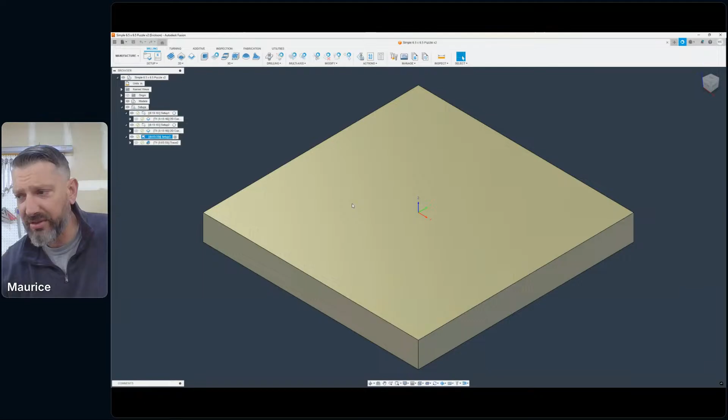So my next video is going to be like an easy to medium to hard CNC project. The easy CNC project is just going to be a very simple 3D puzzle design, and we'll pull these in. So just making the actual puzzle pieces, looking at the tolerances to make each puzzle piece configured correctly. And then I'll probably put a simple design on top, maybe using my laser, maybe my company logo, which would be pretty cool. So that's the easy one, and there's not a whole lot to the file.

I think any kind of basic CNC woodworker can make this and be overall pretty successful on it. What I'm going to end up doing is take that a step further, and I'll pull up the next step.

And this one is just adding a texture, and that would require a ball nose texturing bit, 3D bit, to put these really cool honeycombs in the actual design. Still the base puzzles from the previous design, and then working into something more complex is adding that profile to it, and then all the steps that are required to that.

I don't know, Cosmin. I haven't got rich yet. Matter of fact, I don't sell anything at craft shows, and so I couldn't tell you what that market is. But a lot of things that I make, people reach out, and it does sell pretty well.

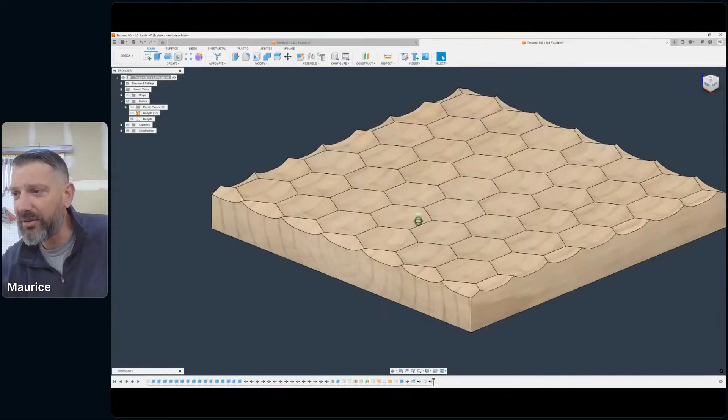And in the manufacturer portion, I ended up doing something pretty cool where I ended up taking a V carve along these lines, and I added some depth to it. So it kind of broke up the 3D surface, and V carving those lines really did a good job of defining those honeycombs. I thought that was a pretty cool feature. Matter of fact,

we'll simulate this, and you can see the depth that this thing is cutting isn't very much, which is pretty cool. So you can paint these if you're using, say, a very light colored cherry or maple. When you paint these lines into this, it does a really good job of defining that space,

and it just breaks everything up. If you ever seen the space warp thing that I did maybe a couple months ago, adding those black lines really defined everything pretty well. So I thought that was a pretty cool feature. Let me make sure this actually has the profile cut into it. Let's bring this back up.

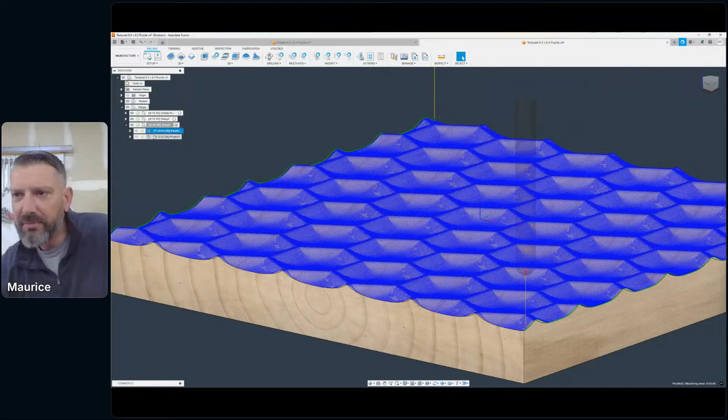So you can see this is a 3D ball nose tool path, and it cuts that in. It does a really good job of it. And I think the overall depth of each one of these honeycombs is probably about half of an inch. So when it goes down, it really does a pretty good job of it. And then just following up with that V carve along those lines, it really does a good job.

But so that's the progress. So something very simple of just cutting these puzzle pieces out, and then additional operations to set this back in the machine and start machining some really cool 3D contours and different surfaces.

You could put it in a laser engraver also, and basically laser engrave anything over on top of it. And it just adds more depth, adds more customization, and these things actually really do sell pretty well. So yeah, that's one of the next steps. The step above that would be, let's pull this up.

So this is a more defined honeycomb, and it has a very defined 3D surface where it's really wavy. I ended up following the wave of the honeycomb pattern that I have with the dimples and how the dimples go on the surface. So again, all of these are additionally within the CNC to make that a reality.

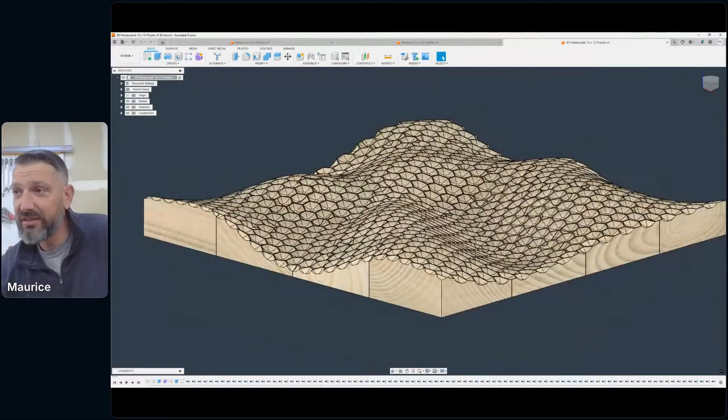So really defined, very, very wavy. It's going to take a while for this to machine, but you can see the honeycombs follow that 3D surface. And I thought that was actually a really cool feature of doing that. And again, these are all 3D. These are all puzzle pieces.

So I'll pull one out, and you can see the definition of this puzzle piece when somebody puts this thing together. It is very unique. And those black lines you see there, right? That's the V carve defining that portion of that honeycomb.

If I didn't have this in here, it would be hard to distinguish how that actually lays in. So again, those little details really define it. But yeah, so that's the 3D portion of that puzzle piece.

And it's just a build on. So if you can get through the simple portion of just cutting out the puzzle pieces and then getting into the more advanced steps with different types of bits and operations, tool paths for the CNC, it's almost endless on the possibilities of defining that piece to the overall structure that you want.

I did a couple more 3D designs. I did one, ended up doing a star version of this, and yeah, we'll see if this pulls up. So you can see the puzzle pieces, this is a round puzzle piece, and what ends up happening is this builds a kind of tray, and these trays are, I want to say, about 7 inches in diameter, so it's actually pretty robust, and I hope this star pattern will come out pretty well.

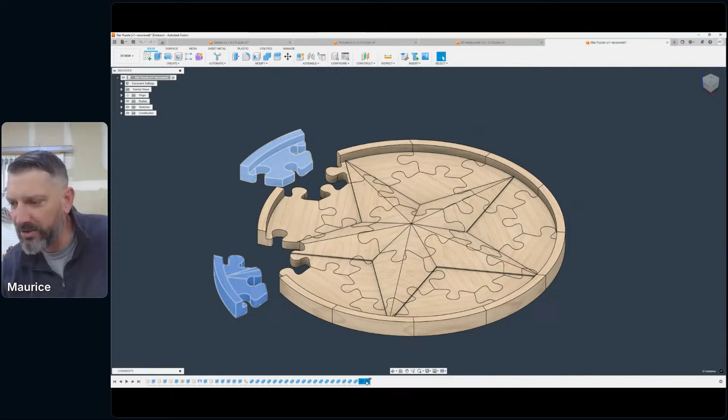So I'll put the puzzle pieces back in, and let's change this up so you can see the definition of that star. Again, these are all puzzle pieces that are putting this thing together. So if I wanted to move a middle piece, you can see how all of that interlinks together. And what's nice when you're using Fusion 360 to build some of this stuff, is you can see...

The toolpath generations give you a really good idea of what the final outcome is going to be. So you can visualize different woods, different types of coloration that you want to put into it, and you can build a really good picture of the final end state before you even step in the garage to realize what it's going to actually be. So it's pretty cool.

So over the last 2 months, that's kind of what I've been working on. I haven't been posting a lot of pictures. I haven't been in the garage for a really long time. And this week, I'm going to go ahead and do a video on the step by steps and then the progress from easy, medium, and hard projects for the CNC.

So that's where I'm at. It's kind of a pretty good overview of what's going on.

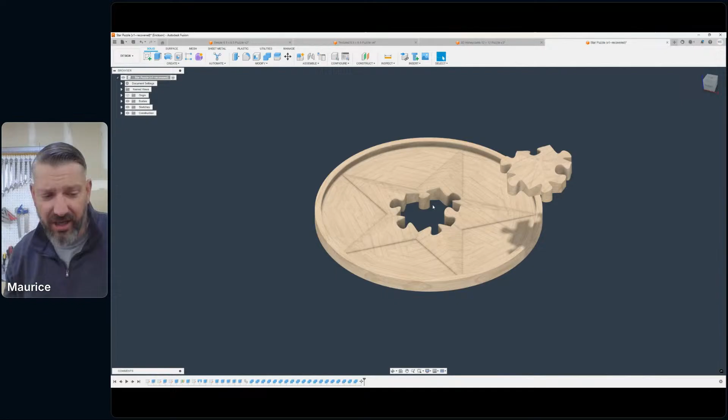I'm probably going to get into actually drawing a more 3D pattern today, kind of a dish puzzle, kind of like the warped space theme that I did, and start working through the design process and make that a reality. So if you guys want to stay for it, if you guys want to ask questions, great, that's the whole purpose of the live stream.

And I'm probably going to jump into Fusion and actually start making this. Pretty good, it's something that I've been waiting to do for a while now. So let's put this back in. But yeah, endless possibilities with different designs.

So let's go back. So I'll kind of work through the workflow that I did for all these iterations, and what I ended up doing, I started with this.

So I'm going to go ahead and just save as, and then I'm going to do this as a 3D warp puzzle. Let's do space warp. I think I'm going to keep the space theme.

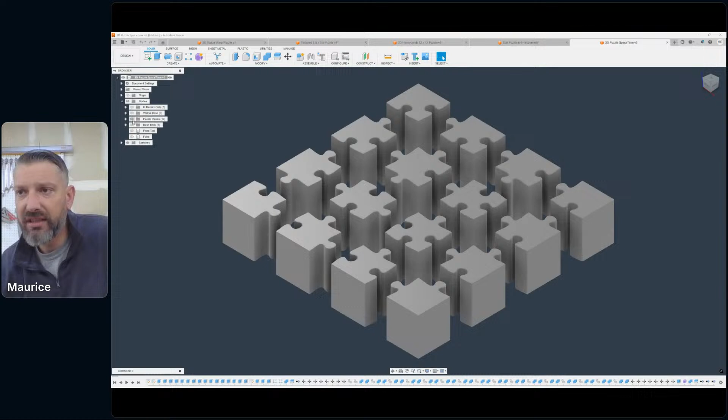Yeah, yep. So I'm going to make this today. I'm going to CAD this out exactly how this is. And you can see that it has some pretty cool features.

I'm going to cut this into this base of this walnut, and these pillars are going to hold this thing up. But as you put the puzzle together, this is a puzzle piece, the base is a puzzle piece, and then these are all individual puzzle pieces.

And let me pull this one out. Yeah, they're not grouped, it's okay. Let's do this. Yeah, so very basic.

I'm going to cut a little dip into the wood. That way, when you assemble the puzzle pieces, the first 4 pieces that you assemble will go right into the box, right into the base. The pegs will get inserted, and then you'll eventually just go ahead and start making this. So actually, yeah, let me hide all these.

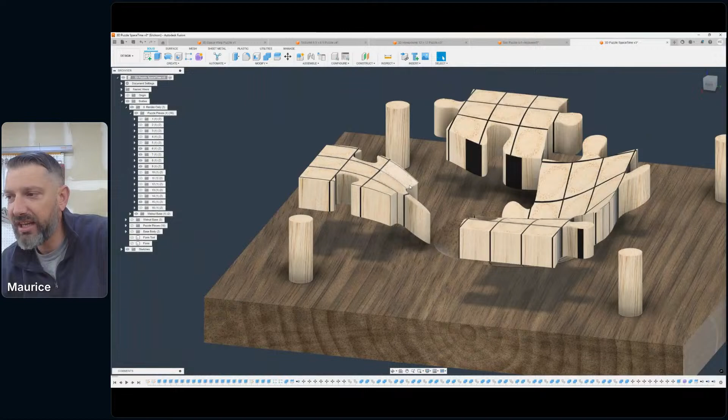So you can see how each puzzle piece fits, and they're all suspended. That's a pretty good radius for this piece right here. And they're very, very unique. The tolerances, when they connect to themselves, will eventually hold everything together, which will be pretty neat if I can actually get it to work.

But I'm going to redesign this because what I ended up doing is making these individual bodies of these lines. I don't want to do that. Originally, I was going to make an end grain cutting board, and then when you cut them, you can insert veneer strips to get those really fine lines, and they'll go all the way through the material.

With this project, I'm only going to V-carve these black lines. So it's just going to be one solid block of wood that I cut each puzzle piece out of, and then those puzzle pieces will get V-carved for those lines. It's a lot easier, a lot faster. You could still glue everything up and put the veneer lines in, but that's pretty time consuming, and that's something I didn't want to do. I already did it once, and it was pretty labor intensive.

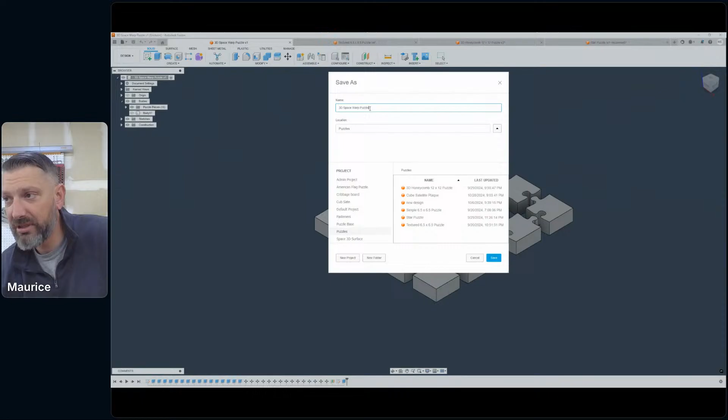Okay, so I'm going to hide all this and exit out of this. I'm not going to save anything, but what I'm going to do is use this file. I'm going to save as, and put this in my puzzle folder, and this is going to be the 3D space warp puzzle. So let's save as there.

And then I'm going to delete. I'm going to keep that. I'm going to go back to my original sketch. And these are the puzzle pieces that are put together. To get this, when I extruded it, I just moved those pieces away.

So that way I could have enough room for my bit to go through. I don't need that right now. I'm going to save that because I'll use that as cut files for later. But let's go ahead and extrude all these to 1.75. And more than likely, I'm going to use this block of cherry to cut all the pieces out.

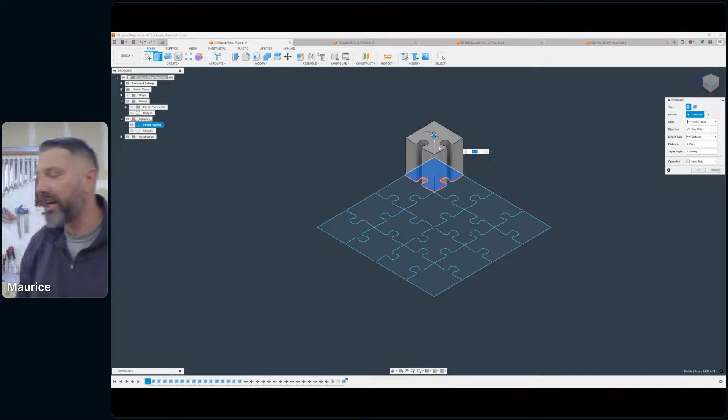Right now, this is planed to 1.75 inches. Let me get my calipers. Yeah, it's right at an inch and 3/4. So this is my base material that I know I have. I'm probably going to flatten it just to make sure everything is extremely flat. But yeah, so the end state is to get these to 1.75 inches.

So I'm going to extrude all of these and get the overall depth of it. Actually, let's do this. So these are 1.75. And I'm going to do a new body, that way it doesn't pull everything together.

And then I'm going to right click and hit repeat extrude, and I'm going to do that for all of these. I'm going to copy this so that way I can paste. It's saying it's not wanting to go for me.

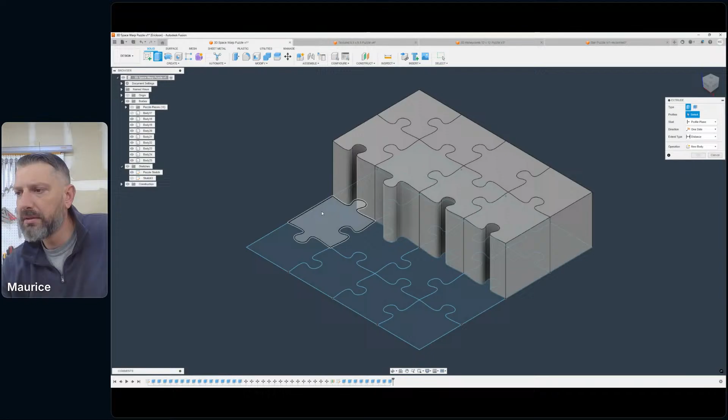I just got to make sure every one of these are brand new bodies instead of joining them with the other two. And then I'll come over, right click, repeat extrude, new body, repeat, new body. And last one.

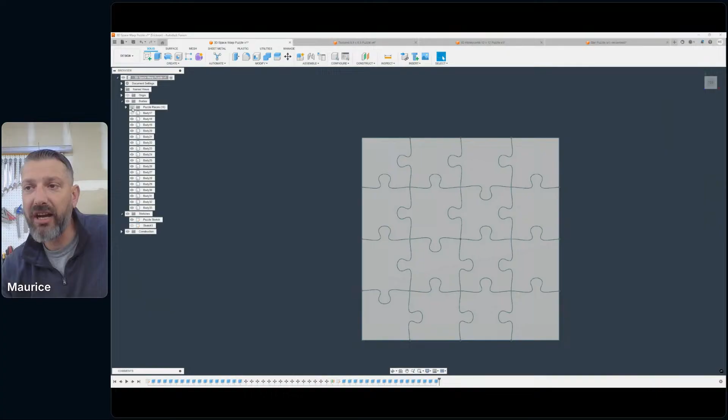Okay, so the completed puzzle with all the pieces, I forgot to mention, the square that I did was 6.5 inches by 6.5 inches by 1.75 inches depth. So now what I can do is manipulate these to where if I need to cut them out, I can move them however much distance I need to allow enough room for my bit to come through. That's why I saved this other file, these other bodies.

But what I want to do is use this as a base to cut a 3D profile into. And so with that, I'm going to go ahead and make that 3D profile. What I want to do is make it like that warped space, the space time holder that I did. And so to do that, let's go ahead and hide these bodies.

I'm going to hide this sketch, and I'm going to draw on the bottom plane a new square. I'm going to use the 6.5 by 6.5 square so I keep everything symmetrical. I'm going to extrude that by 1.75 inches, or 3/4.

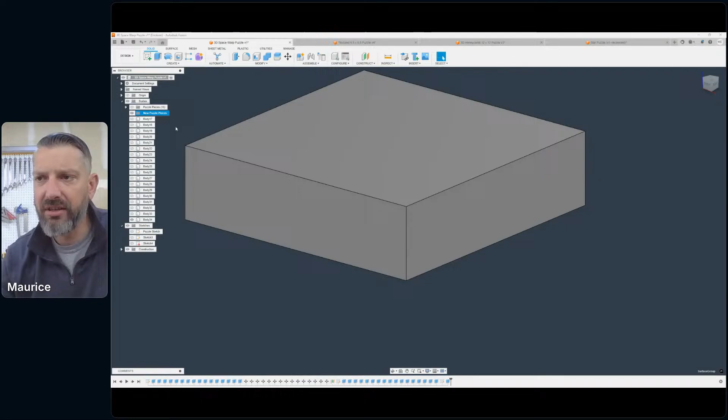Let me hide these. Now, since I've made all these bodies, I'm going to make a new folder, a new group, and call these new puzzle pieces. I'm going to dump all these in there, and that really does clean everything up, so I can see all my puzzle pieces after I unhide everything.

I'm going to hide that and bring this body back in. I'm going to create a form off this. So I already have known goods, and I can build a plane off of this box of these dimensions.

I'm going to go up here and click 2-point, select this point, this plane, and then this point to this point. When I'm building a form, I like to keep the number of intersections very small. So I'll hit OK on that, and then bring this down.

That will give me that space-time scene that I want. But I don't want to bust through this because that's the material that I'm working with.

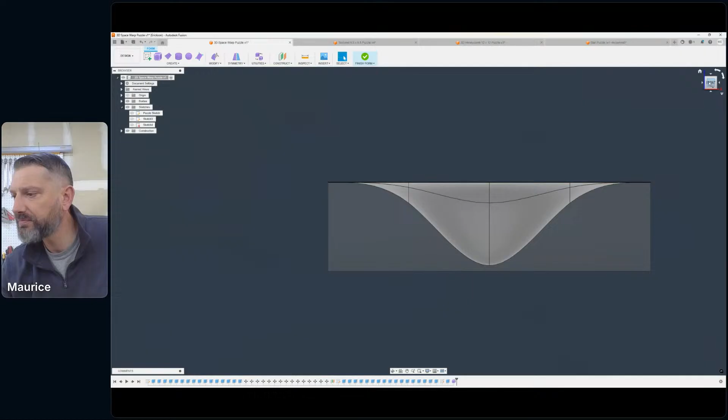Let's go back here. I'm barely going to go to the bottom of this thing, and this will dictate how thick my actual material actually is. Let's go right about there. Yeah, I like that. That's the profile that I want, which is actually pretty cool. I'm going to cut this into those puzzle pieces and it'll give me that profile I'm really looking for.

But before I do that, I want to add thickness to this. Thickness of the materials, I'm shooting for at least half an inch thickness of this plane. So I'm going to go to modify and thicken. I'm going to come down 0.25. We're going to come down 0.5. And I'm going to keep that sharp.

Direction is normal, so now it thickened everything. That's what I'm going to shoot for. Now, did I bust through? Which I did. So I'm going to have to come back up.

I'm going to use my wireframe on this because now I have 2 points: the thickness here and the top portion here, and that's the same for the bottom. So if I want to bring this up, I've got to do the top portion and the bottom portion of it.

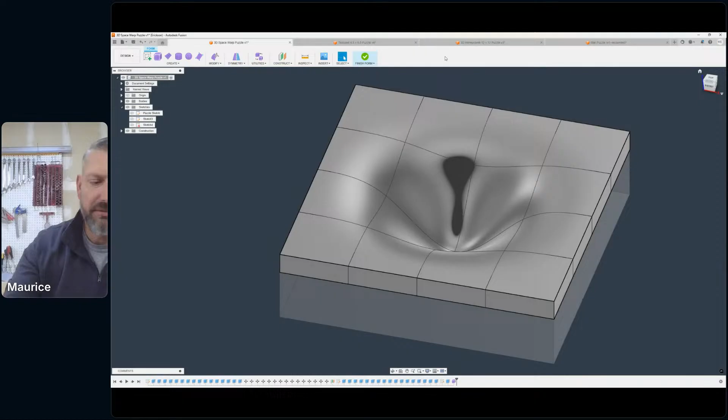So let's go ahead and move. We'll edit form. I'm going to select this top portion, this point right here, and then select this bottom portion. So now when I move, all of that will move as one. We'll bring this up just a little bit.

I like it. Now I left a little space at the bottom because I'm going to move this down just a little bit. And that's the profile, and I think that actually looks pretty good.

Now what I can do is make this a little skinnier by taking this top portion and bringing it down a little bit closer to the bottom, essentially just thinning it out. So let's bring this down just a little bit. I like it. Okay, so let's do a wireframe and I'll show you what I meant by that.

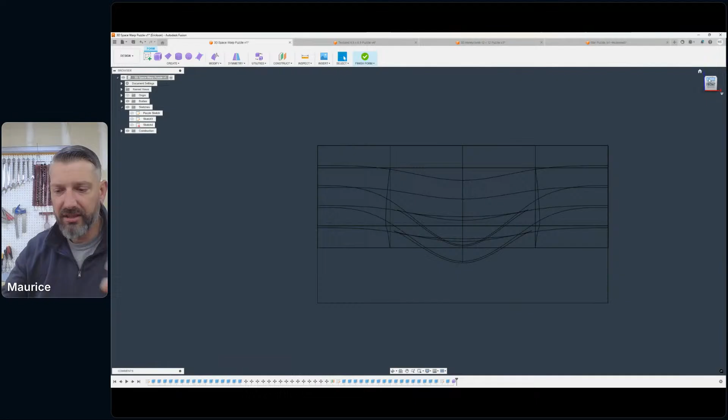So you have the 3D portion of this. This is 0.5 thickness. And then when you get down here, it kind of stretched down, and when it stretched down, it went a little thinner at the bottom. That is consistent with if you had a heavy object on a piece of cloth or material that, if it had enough weight, would stretch downwards.

I think that's actually pretty neat to build into that overall model. You'll see it on the puzzle pieces, where the puzzle piece will be thicker on one side, and when it goes down, it will shrink. That's actually a really cool little feature. All right, let's get out of the wireframe, and we're going to call that good.

Now I'm going to bring in my puzzle pieces. I have my overall mesh that we made. It's not really a mesh anymore - since we added the thickness, it's actually a body. Let's go ahead and we're going to cut these into these pieces now.

What I'm going to do is just bring this down like 0.05, ever so slightly, still within the puzzle pieces. Ooh, no, it's not. Let's go back. Well, let's see if it will actually cut it.

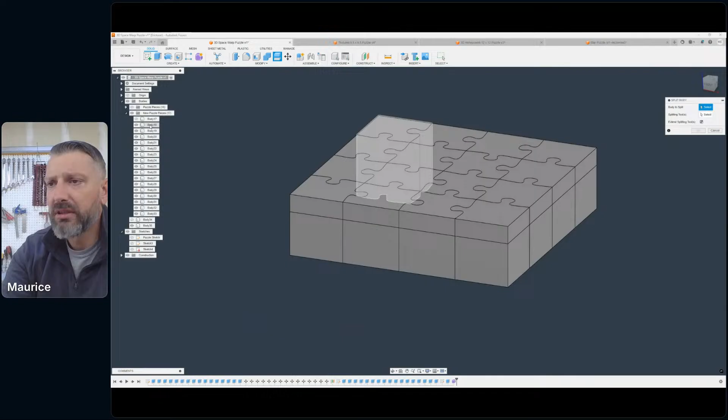All right, bodies to split. We're going to do this all the way down, and we're going to use this as a splitting tool. I'm going to extend it. And it looks like it worked - so when it split everything, it made all of these bodies. I'm going to go ahead and delete all these additional bodies that it made.

All right, let's remove those. Then we'll bring these back. So that is all the puzzle pieces now with that profile. Pretty cool little trick because these are very complex in nature. So if I was to move this, that's what the overall puzzle piece will look like. Very unique,

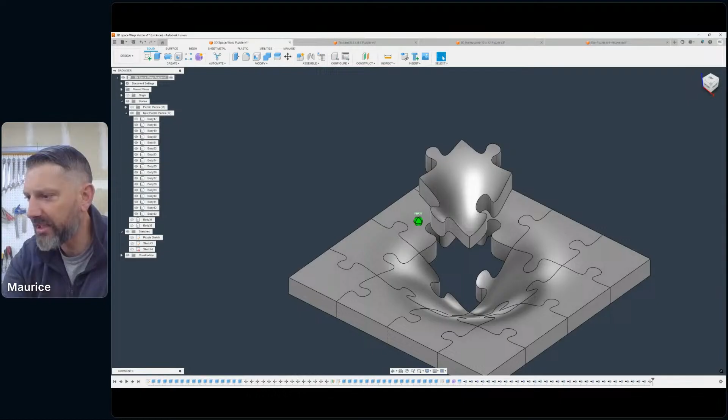very slanted. And when I program the CNC to cut these out, I got to do it in a way that it actually is tight enough to hold itself together. They have to interlock and they have to bear its own weight. So if it's too loose, they won't do that. They won't bind just right to hold everything together. And so we'll walk through what that actually looks like, and I think that actually looks pretty good.

Let's do this side. Look at this one. What I'm also looking at is the overall thickness. So anything that's smaller than 0.25 will get brittle enough to break. So if you're trying to put everything together and you're just trying to assemble the puzzle, if it's smaller than 0.25 on one of those edges, there's a good probability that that thing's going to break.

So adding an additional eighth of an inch thickness, we're talking very small dimensions here, but that thickness will give you more stability in the actual material, and so it won't chip as bad, or it won't have the ability to break when somebody actually tries to put this thing together. So it's definitely something to look at, and I don't see any other issues.

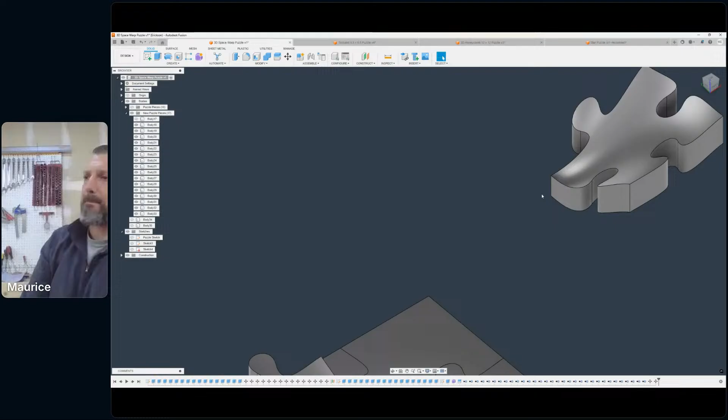Those should all be the same, as this is the lowest point indicator. So just having that 0.05 actually makes sense. So all right. So those actually look pretty good. So what I'm going to do now, I'm going to put these back. And then I'm going to have to put the holes in for the bottom of the base for the dowels to connect. But let's go ahead and build the actual base. So let's do that right now.

So I'm going to start a new drawing. I already know that this thing is already centered in this plane, so I can click this bottom plane. And if it's 6.5, I like to have at least an inch to work with. So let's go ahead and go 7.5 by 7.5. Sync. That'll actually look pretty good.

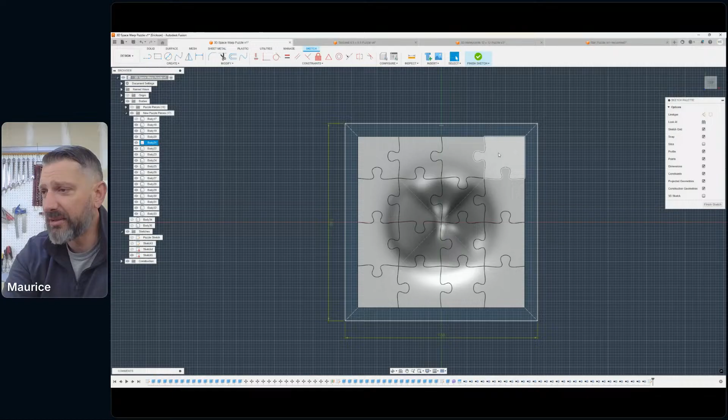So that's the overhang, and I'll probably take a router and I'll route a profile along this edge, and that usually gives me about a half of an inch to work with. So it's actually cutting it pretty close to where that profile will be along that line. The only reason why that's important is when I determine where I want the holes. I got to make sure that it's actually not inside that profile on the outside.

Okay, let's do this. So let's use the rectangle tool, and we'll find the overall dimension of that center point.

Yeah, Brooks, I want all the puzzle pieces and how they join together to be in the same grain direction. So I'm going to keep it face grain, and I'm going to keep it where it goes from left to right. And you can see that with this example. And when somebody's putting the actual puzzle together, they'll know if they actually flip this thing up or have it in the wrong direction. So I don't know if they'll actually visualize that or understand that, but I want the grain to be face grain and left to right.

I've had some issues with a couple. I did a puzzle that was end grained up, and I had issues with pieces breaking, just because the end grain in that direction was so weak. So it's definitely a concern. Yep. But if you use face grain and keep it left to right and have that consistent through all the puzzle pieces, you're good to go.

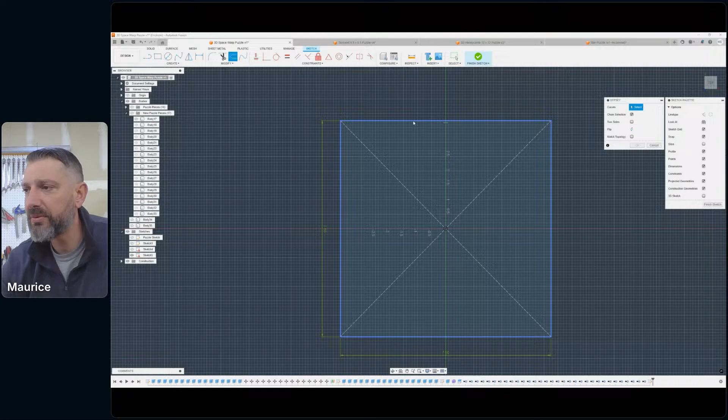All right. So let's drill these holes. Actually, let's just use the offset tool. So we'll offset this outline. We'll come down. I'm going to unhide this so I can see where I'm at.

I'm going to create circles for the dowels. Dowels actually measure pretty close to 3/8. I find that if you go 0.38, those dowels fit pretty perfect. Actually, I'm going to go just a little bit more. So 0.385 gives me enough tolerance that when the dowels go into it, I don't have to force them in. Just finger pressure and they'll go down into it.

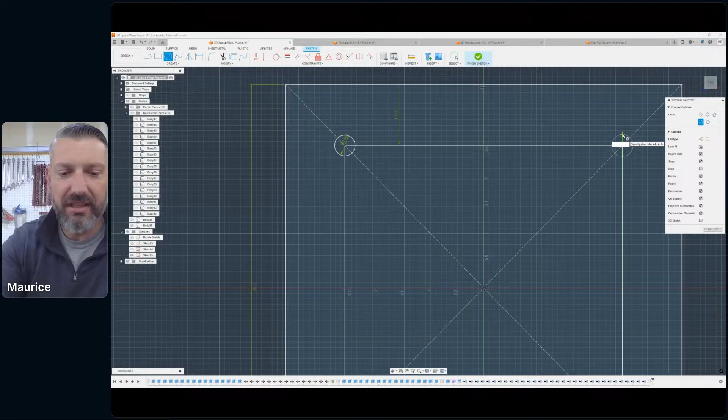So if you add just a little bit of tolerance to it, it actually fits pretty user friendly, and you won't have somebody trying to bind something in or end up breaking the piece overall. I've learned that the hard way. So just adding that additional 0.005 pays some dividends. Let's just say that. So let's do 0.385.

And we'll do another one. And I can actually just do this, and I'll just constrain. So this will equal this. This will equal this. Exit out of that. And then I'll just delete these lines now. Okay. So that's my base drawing. I'm not going to put anything else into it other than all these bodies, and cut it into that actual base material. So I'm going to finish this sketch, and then I'm going to extrude this downwards.

And I deal with 4/4 material. So say this is Purple Heart. This was rough lumber. And then what I'll do is I'll plane it. So 4/4 is just under an inch when you buy it at the lumber store. And I'll feed this thing through my planer, and I'll get it down to 0.75. I usually plane all my material to 0.75. It keeps it very easy to remember, especially if you're going to machine something, and if I design everything to 0.75, I automatically know that I'm going to plane that to 0.75 or already have it planed.

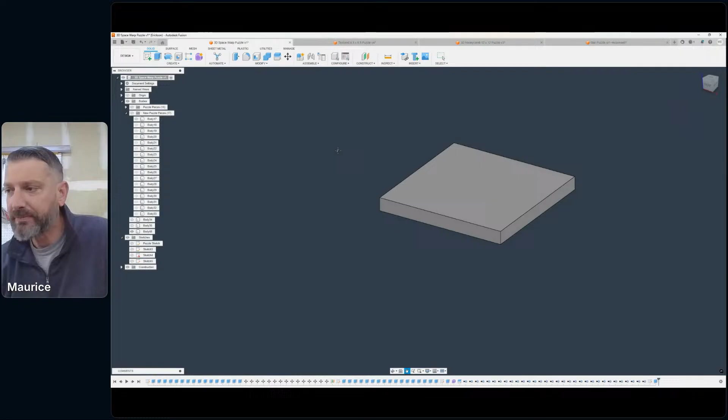Okay, I'm going to bring that sketch back up. And that actually should have been a negative because I want that drawing on top. So I'm going to put this as a negative. So now I can see my drawing. I can actually drill these in. Since I'm at 0.75, I'll probably put them at a quarter as far as depth. And that should give me enough space for those dowels to stay in there. So we'll do that as a negative.

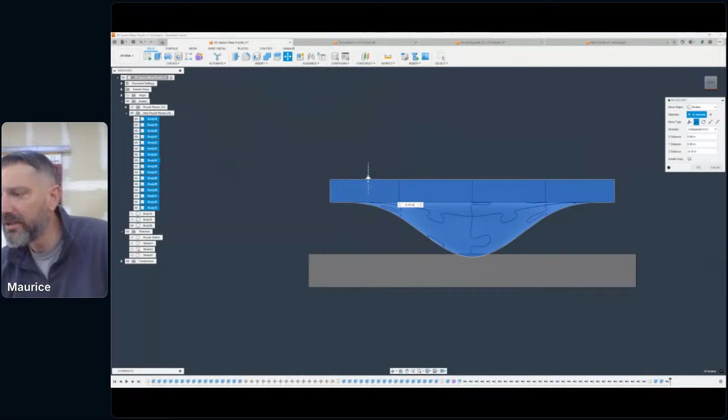Good. And then I'm going to pull all of these back up. So I'm going to get rid of this. Don't need that anymore. All right, I'm going to hide this sketch. And since I want this to be supported on this base material right here, I want the base to hold this together. So I'm going to take all of this stuff. I'm going to highlight all of it. And then I'm going to hit the move and copy. And I'm just going to bring this down. And I can see how far I'm going in.

And it doesn't have to be far, but I want at least good contact in between each individual piece. So if that joint right here is about half, I'm comfortable with that. I'm hitting half that joint, and I'm basically hitting it on all sides. So I think that actually looks pretty good. And I think that's enough support. Okay, so I'm going to hit OK on that.

And then what I'm going to do is, actually I'm going to combine. So in the combine tool, this is actually pretty cool. I'm going to use the cut feature in this. So the target body is my base. And sometimes this doesn't work, so we'll see if there's another method if this doesn't actually work. I'm going to use a cutting operation. And then the tool bodies are going to be everything that's on the bottom and touching it. So there's 4 pieces here that are touching that base.

And then I want to keep my tool. So these bodies that I used to do the cut, if I don't click that, it's going to delete those. And it's only going to keep the bottom cut, and it's going to get rid of all this other stuff. But if I click that, it's going to keep that tool as, that is still valid. Okay, so I just hit OK on that.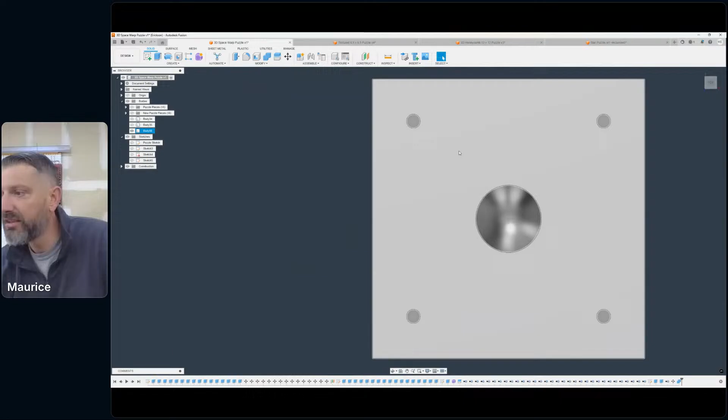And now you can see, let's hide these puzzle pieces, and there's my circle that's 100% in the middle of everything where those need to be. Sorry, give me a second here. So I have my dowels. I have the comb, the radius here that I want the puzzle pieces to sit into.

And now let's go ahead and do our dowels. So quickest way, click the inside of these. And I think it was a 1/4 inch deep. Let me, hold on. These kind of froze up there for a second. I'm going to click the bottoms of these cutouts for the dowels. And then from the side view, since they're all selected, I'm going to pull these up.

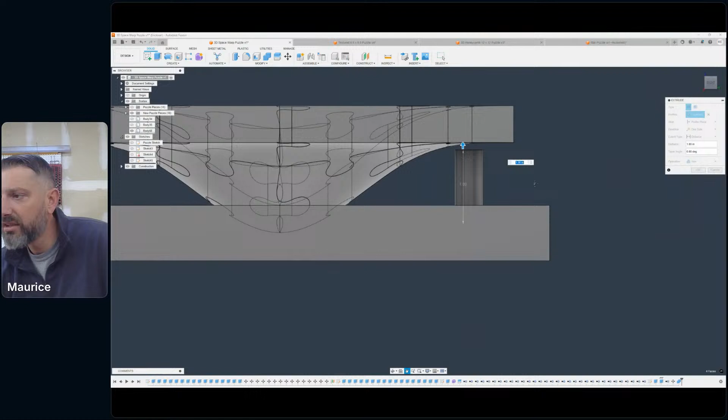And I want to keep a good distance for these dowels so I can cut them all at the same length. To see inside here, I'm going to go down to my display settings, and I'm going to use shaded with hidden edges. So then I can actually see my dowels as I go through, and I can see where they're at. That actually didn't work very well. Let's use wireframe.

Interesting. That's an error with Fusion. I should be able to see right through that. But if that bottom right here is 1.1, if I go to 0.125, it should be okay. Not a whole lot of space on that pocket, but at the end of the day, it should be fine. I wonder why that's not letting me see inside there. It's interesting. I should see that line come up, and I should see how far I could go up. Let's hit cancel on that.

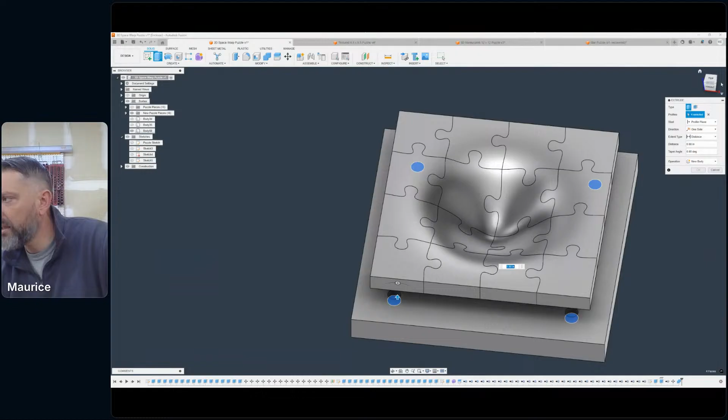All right, let's bring my visuals back. Wireframe was hidden. That's probably why. Let's try this again. Let's bring these dowels back up. And then let's bring these all the way back up. I'm going to bring those visual. That's probably why it was doing that. So there we go. That's why, I ended up having join, and when it joins, when it calculates it, it's not showing it because there's nothing there. New body shows me that I have this in.

So 0.25, that's not a whole lot of space here. That's not a deep hole. So let's go 3/8. So 375. So the overall distance for these dowels will be 1 3/8 by 3/8. What I don't want to do is hit OK. Well, yeah, I can do that. Okay. Let me pull the visual settings.

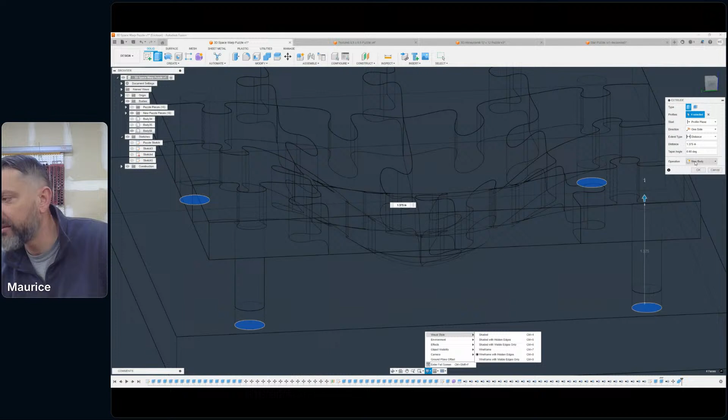There's two ways you can do this. The one way is you can create the new bodies, and it won't account for this going into this piece. So they'll just be kind of merged together. To get around that, you could just go ahead and cut this and then do the operation again, and then make a new body, and it will fill that gap in. I'm going to go ahead and just do new body, and I'm going to cut these back into these 4 pieces.

So let's go to visuals, and you can see that I created those dowels, and they're 1 3/8 that are going into that piece. But now I gotta cut this into this to give me that space. So when I do my tool pathing, it'll account for that cut for the dowel. So I can do the combine tool again. I can select my target bodies. These are the 4 corners of this.

And then oh, let's do this. Yeah. We'll do split. All right. We'll have to do it the other way. All right. Let's try this again. And this is the thing with Fusion, the thought process of, yeah, this will work and I can use this operation to do another operation. Sometimes it just doesn't want to do it. And so you got to really experiment with Fusion on what you actually want to tell it to do. So let's go back here.

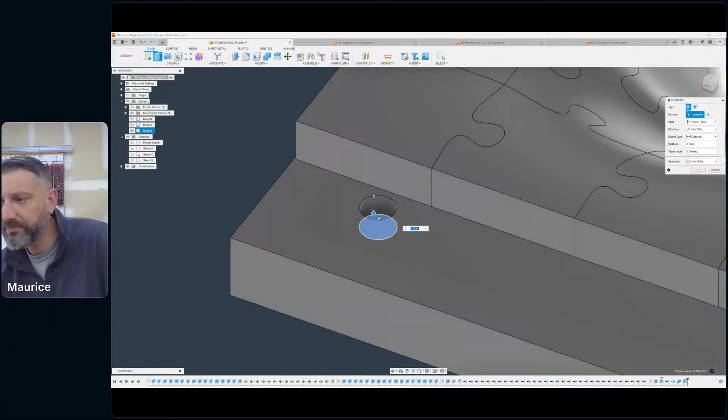This is going to be 375. And then I'm going to go ahead and just cut that in. So what it's doing is it's cutting those 4 pieces, right? These 4 pieces are getting cut into these 4 pieces. So when I hit OK, now it has the holes that are pre-drilled into those bottom pieces. Now what I can do is go back to my extrude, come back here, select those holes. And I already know 1 inch and 3/8 is the overall length of the dowels. And I'll just go ahead and create new bodies and they'll sit right into it.

So then this will be 1.375. And then instead of join, we want new bodies. And hit OK, and now I have my dowels. So now if I hide this, these are my dowels. They're exact locations on what my machining operations will be for that puzzle piece. And then my puzzle pieces are aligned correctly and have the correct holes drilled into them.

So no matter what, when I do my dual-sided machining, I'm accounting for both sides, the top profile and bottom profile cut with the additional holes. That's all automatically programmed in. All right, so that is good to go. And my puzzle pieces are good to go. And now basically what I can do is I can start machining.

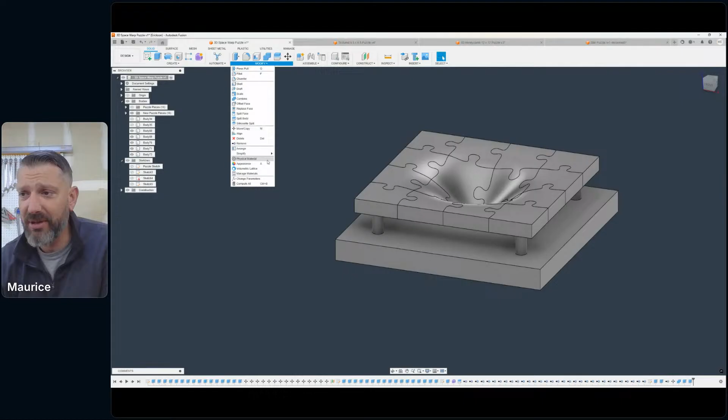Now, when I start my machining, I have to have a game plan. I have to have a strategy for my workflow and how I'm actually going to cut everything out and what Fusion needs to do this. Because I can automatically visualize. I'll set some appearances on this. Let's say that I want the base to be walnut. So let's do the base as walnut. My pegs will be probably cherry or maple. Pine actually looks like maple when you do the different textures and everything in Fusion 360.

And then I'll probably do cherry for the actual puzzle pieces. So let's go ahead and we'll drop this down and I'm going to select all my bodies. And then I'm going to take cherry. I'm going to drag this over to all these bodies. Give it a second to think, and it should apply that texture to all the pieces. I don't like how that looks with the cherry. I'd have to go through here and edit all that. But let's just use maple. It gives it a lighter color. That looks better. Cool. Okay. So I have that.

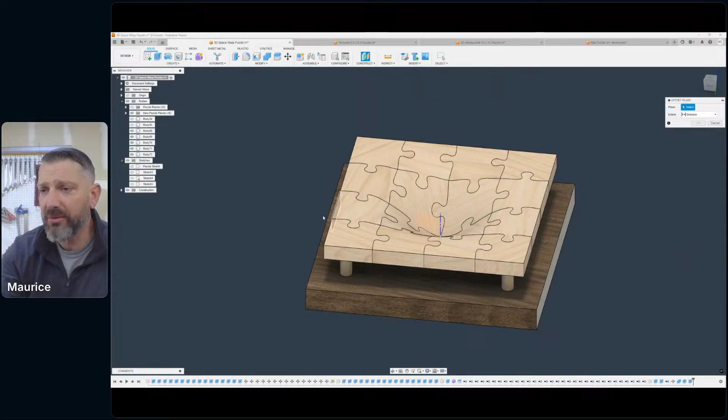What I'm going to do now is I'm going to account for all the lines that I'm going to V-carve into this before I go into the machining ops. So to do this, I need to know where the top surface is to my plane. And then I have to draw the lines for the V-carve operation to follow it. So what I can do is I can do an offset plane. And this is all in preparation of drawing these lines. So I'm going to hide everything, get everything nice and clean. I'm going to select this bottom plane. And then I'm just going to drag this up. I'm just going to leave it there for right now.

I'm going to bring my puzzle pieces back in. And I want to make sure this plane is pretty close to the top. I don't want it below, and I don't want it too far up. I'm just going to put it in a place where I know it's above the working surface. So I'm going to hit OK on that. Now, I'm going to hide this. I'm going to create a new drawing. I'm going to select that plane that I just made. And it's already centered into everything, so I don't have to worry about anything getting misaligned. Everything is bound into the center point.

I'm going to use the rectangle tool, go in, and I'm going to build the outer box, which was 6.5 by 6.5. I'm going to hit OK on that. And then I'm going to draw a vertical line from the center point and a horizontal line from the center point. And then I'm going to use this really cool rectangular pattern feature, and I'm going to make a grid pattern, and I can select this other one too. So I have those 2 lines highlighted. I'm going to do equal spacing for my distribution, and I'm going to set that at 0.5. So every 0.5, there'll be a line.

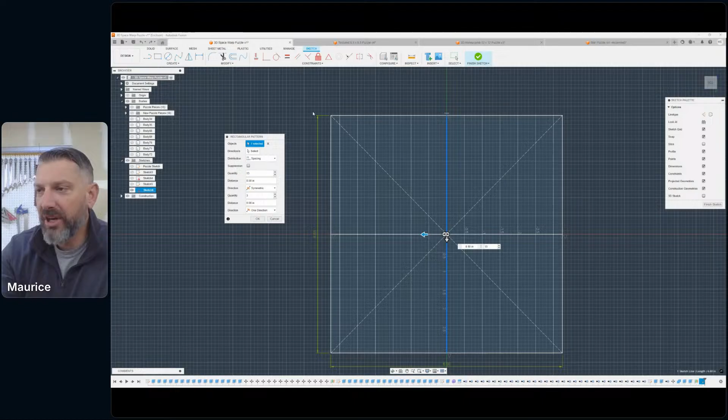I'm going to right click, and I'm going to repeat the rectangular pattern, and I'm going to select this horizontal line. I'm going to do the same thing. So we'll do 0.5, we'll do symmetrical, and then 13. Okay on that, and there's my grid pattern. Very fast, very effective, and they're all constrained. So I don't need this outside box anymore. I just made that to make sure I'm within constraints of the profile that I want.

And now it's good. So I can hit finish sketch, and when I look at it from the top, there's my grid pattern that I want to cut into. So my V-carve will follow these lines, and it will V-carve against this profile. Very, very easy. Okay, so I got that done.

Now what we want to do is figure out how we're actually going to make this, how we're going to do the machining operation. I don't need to account for any of these lines during my 3D profile cut. Matter of fact, if I keep those in there, it's going to make my life a little bit harder, and it'll make Fusion harder to work with when it's calculating all the different constraints that you have to put in for your tool pathing. So I don't want that. This is good to visualize and make sure it's something I actually want to make. But in machining, I don't need that.

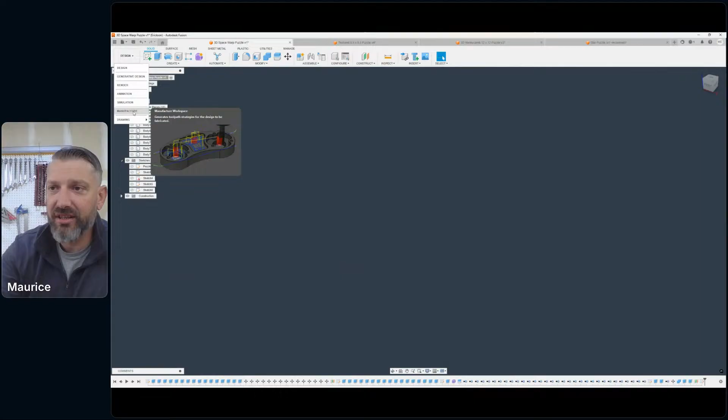Matter of fact, my machine operations already account for, actually, let me delete this one. It already accounts for my puzzle pieces that I want to have. So these puzzle pieces, and these right now are only 0.75. I have to add an additional inch to these. So we won't use this, but I'm going to right click, copy this entire folder, go back to bodies, and paste this thing back in. I'm just going to duplicate everything. We'll hit OK on that. I'm going to hide all those.

Yeah, I can't do that. I completely forgot that I cut that profile in. So all these puzzle pieces are basically unmachinable. How I'm going to do this: actually, I'm going to delete all of the additional copies that I made. These puzzle pieces, I'm just going to increase these by an inch. And we'll add an inch of material on this. Join. Okay, so these puzzle pieces are aligned to where I can bring in an 1/8 inch bit.

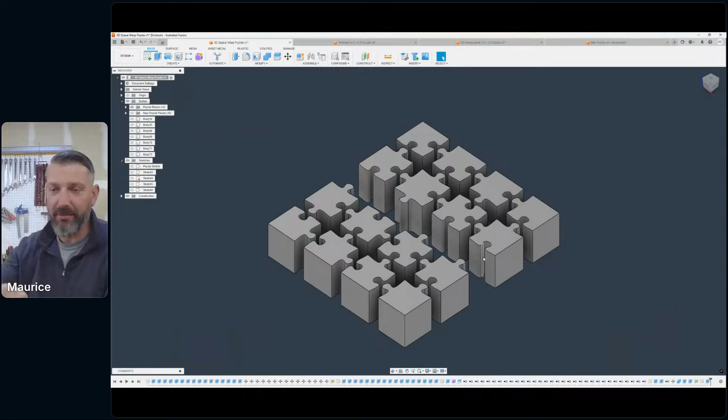For this exercise, I'm going to keep it at an 1/8 inch bit, and I'm going to modify my tool in my tool database to account for the entirety of the 2 inches of flute needed to actually cut this thing out. If I had an eighth inch bit that was 2 inches long, which they don't make, I don't think they would survive the cut. You'd probably break that bit in half.

What I can do is scale this entire drawing and get it to where a 1/4 inch bit could get in here and cut these radiuses out. Because right now, a 1/4 inch bit is not going to do that the way it sits today in this drawing. All right, so with that as a fact, we'll go ahead and modify this bit to account for this cut.

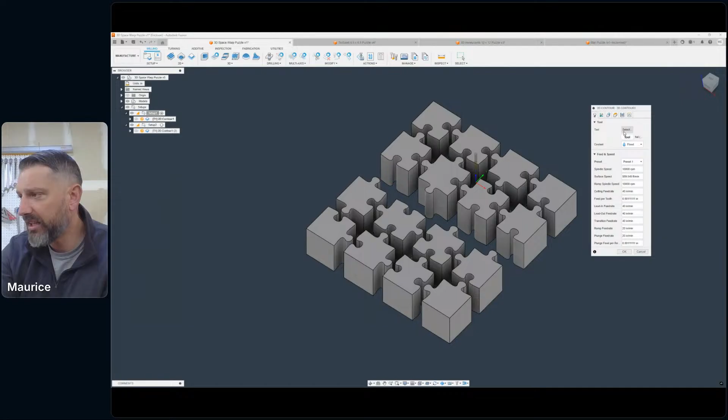So I just went into the manufacturing portion, and I'm going to bring up my tool database library and pull this into the middle of the screen. And this 1/8 inch bit, I'm going to right click, I'm going to edit this tool.

The Amana tool database that I downloaded for this, this is all inputs from the manufacturer into this software. All the cutter, all the different lengths, the flutes, all that really cool stuff. So the overall length of this Amana bit is 2 inches, 2.5 inches.

All right, that gave me a very, very long 1/8 inch bit that will cut this thing out. This wouldn't work in real life to be 100%, this thing would snap right in half. But for this, it's okay.

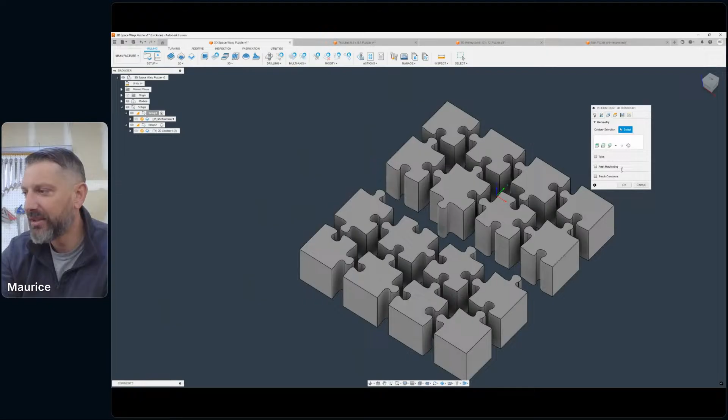So from here, actually before I even get started, I need to correct my actual settings. So the material that I have is set to be 0.75, I can't do that. So I'm going to go ahead and delete all this. I'm going to select all these bodies.

And for my stock, I'm going to do relative box size with no additional offsets for top or bottom. So that gives me my 1.75 inch, and then this will give me my overall stock width of a little over 8.25 or 8 1/8, and then a little over just under 4.25 for my width.

For the setup, we'll make sure that my center point is where I'm going to zero. So this material that I end up putting in the machine will be zeroed right in the middle of it.

So when I measure everything, I'll do the diagonal way with my ruler, and I'll mark that actual center point of my material. The material that I put in the machine will probably end up being 8.5 by 4.75, will probably be my overall board that I put in. And as long as I hit the center point of that material, I am 100% good with any kind of work holding strategy or anything like that.

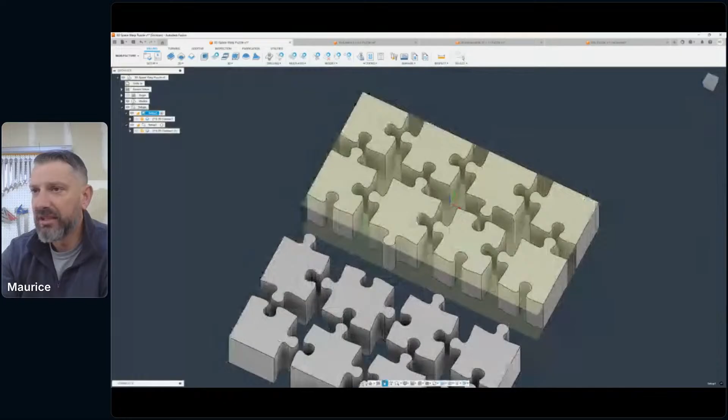So now from here, I'm going to do a 2D contour, and I'm going to select all the bottoms of these puzzle pieces. And I'm going to do them in order, and the order that I click these on will be the order of how the machine cuts everything out.

And then I'm going to do a finish only at final. And what this is going to do is it's going to drag that bit all the way at the bottom for its last pass and use the entire edge of all those flutes to go all the way around those puzzle pieces.

So that's good, that's good. I don't want to leave any stock, either positive or negative, so that needs to stay unchecked. But what I'm going to do is I'm going to check smoothing.

And some of these vertices that kind of have a really defined curvature, smoothing will make sure that if there's any kind of nodes or anything crazy in this where the machine will jump, that will take that out, and it'll smooth that line out, and it will be very, very smooth and very defined curvature instead of jumping around. So I always check that.

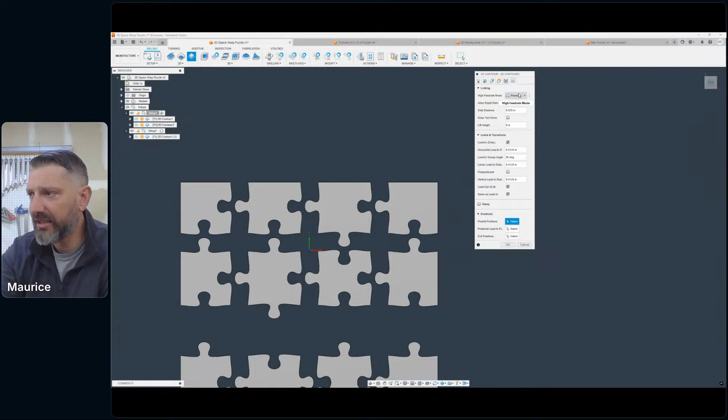Tolerances are always default, I've never had an issue with that portion of it. So that, and I think we're good. I'm gonna do that, that's fine. And then lead in exit is good.

And then I'm gonna set my preferred lead ins to the corners of these. So when my bit comes down, it's gonna come down on this corner for every single one of them. And then it will do the normal lead in and transitions based on these parameters. So I want to make sure that these points are all accounted for.

All right, that's good, I'm going to hit okay on that. And then it should generate this file.

Right now it's 1.75 inches, roughly 8 passes, about 20 minutes on the bottom here. All right, let's delete this.

So that's good. Now we'll do the same thing for this one. I'm going to adjust this stock, no additional. My stock point is going to be in the middle, just to verify. Okay on that, and then we'll use this tool.

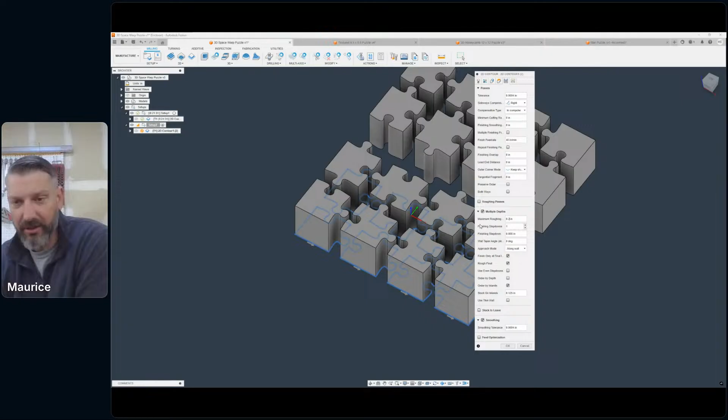These are already highlighted, which is good. I'm going to adjust this to 0.2. Pretty aggressive for the step down, even with an 1/8 inch bit. I don't usually ever go past the overall dimension of the bit, so that's why it was 0.125. But for this, we'll leave it at 0.2.

And then my points are, let's redo them, so we use these corners. Hit OK. Let this generate.

And that's the tool path for this one. So what I can do is I'll go ahead and simulate this just to have a warm fuzzy that I'm good, and then we'll actually cut it out. I don't see anything crazy.

Slow this way down. It's kind of comical how long that bit is. And then it'll cut everything down and all those puzzle pieces will be cut out.

Which is great, so when I cut everything out, I'm going to put everything together. Let me just pull these things up really quick.

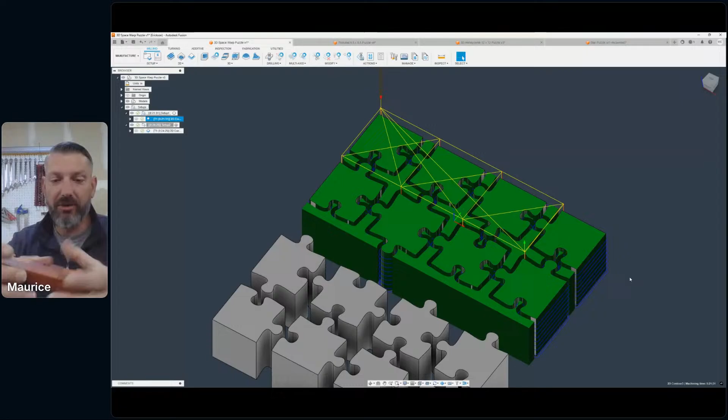When all these cut out like this, right? I'm going to put everything together and I'm going to put it into a jig. This jig is going to crunch everything and hold everything extremely tight to where none of this will move. And it'll be all 4 rows of all the puzzle pieces.

When I put this back into the machine, I consider this, even though it's 16 pieces, I consider this one piece now when I get everything in. So in the machine, all 16 pieces, it is a solid block of wood.

When I program Fusion to cut the 3D profiles and the rest of it, it is all one piece of material. So as long as I have all of this cut out, I am 100% certain that I will have a solid block of wood.

So my solid block of wood profile that I want to work off now would be this profile. This profile that I cut everything out, all the puzzle pieces out for that one profile.

So now what I can do is I can just use all of this and start building my tool paths directly off of this model. So I'll go back into manufacturing and I'm going to do a new setup.

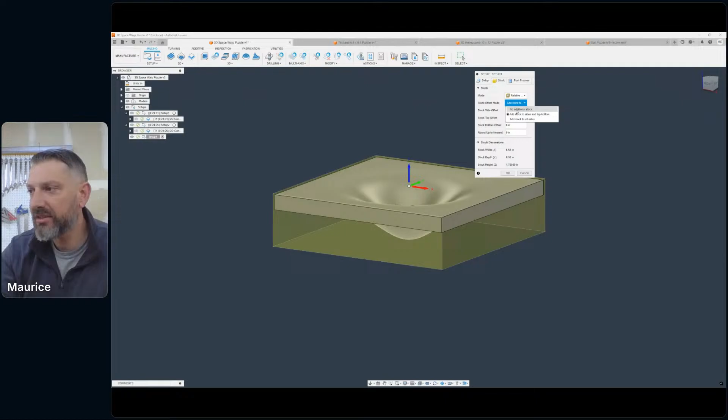Let's do relative size box, no additional stock, right? And this basically says that my stock height of the overall stock that I want, when it's all cut out, is going to be 1.71868.

No, you're good, Mark. This was ad hoc. I thought about it this morning and I was like, you know what, let me just do a trial run and bring some stuff up on what I wanted to make over the next week. So I'm probably going to do this every Sunday. But I want to make sure that I don't conflict with your live stream at once, so I'm probably going to hold the 3 o'clock slot if that's okay.

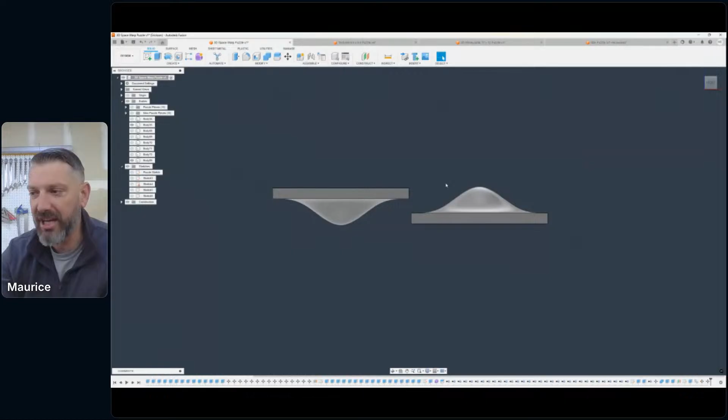That's very important when we start going through the double-sided machining and the tool path generation and all that stuff. Now let's go back into manufacture, and what we're going to do is this bottom first.

Let's do this. We'll modify, let's create a new - actually, before we do that, let's do the grid pattern that we made for this. I need to make sure I use the same grid pattern, and this is all nested within this portion. So let's go back to the design portion and copy this grid pattern.

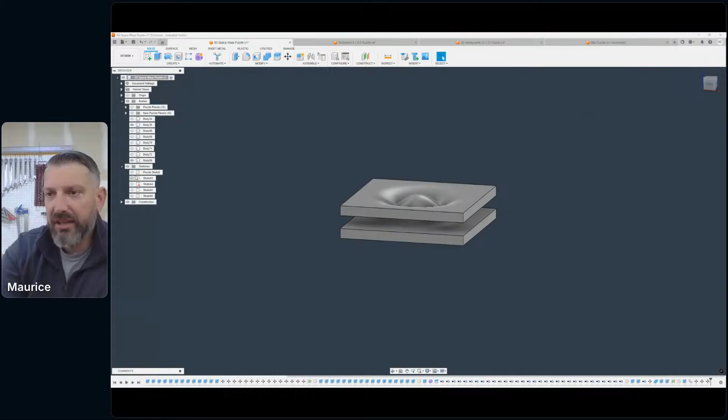Let's save as - no, I won't do that. Easiest way to do this is we're going to move this directly over the top, which is good. That's good, we can hide that and we'll work with this nose - I'm going to call it a nose.

Okay, let's go back to our setup. We'll do relative, we'll add no additional stock. Our body is good, and we're going to click OK on that.

There's one more thing we have to add to this. If we hit this - with this copy, I'm going to have to drill, before I forget, these holes need to be drilled into this.

So what I'm going to do is save this drawing and then re-import it into Fusion. I got kind of ahead of myself - some of these features I've got to make sure actually get added into it. Let's do base hole.

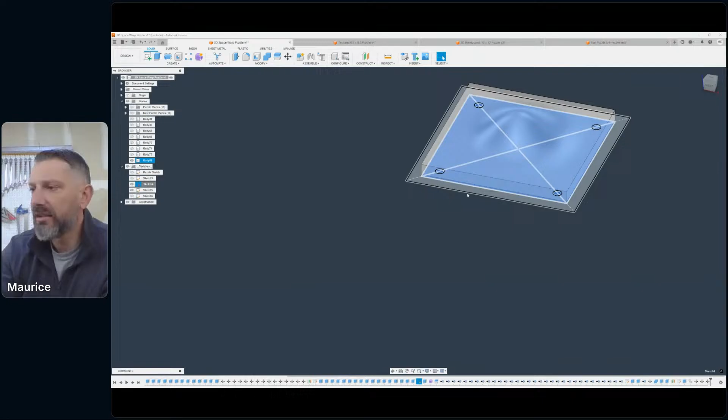Desktop is fine. So what we can do now is hide all this. I'm going to insert that drawing that I just exported - base hole. I'm going to select this plane and then bring it up. Let's try that again.

Let's hide this, let's re-import. This will make sense once I get this thing ready, and you don't want to go any higher than that. Okay, got it, that's fine.

Interesting - oh yeah, my Fusion's starting to act up. Yep, that's okay. Let's see if this will actually work. Yeah, it's not going to work.

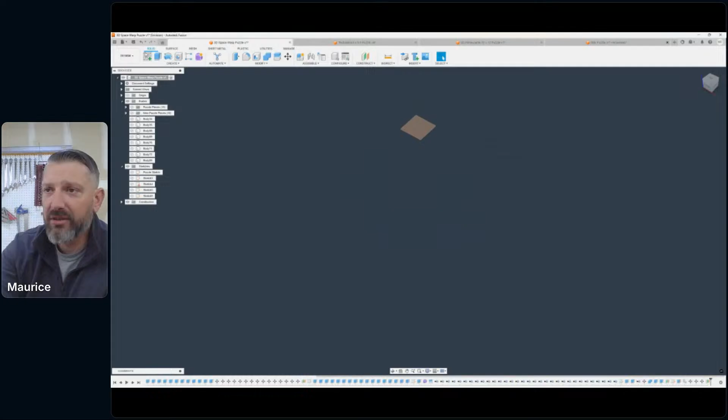Let me just build a new offset plane. I'm going to put it all the way on top, and then create a new drawing on this plane. I'm going to unhide that base with the circles, and then project these circles onto the new drawing that I just made on that plane that's all the way above it. I'll hit OK on that, and when I hide this, now I'm working off of the plane that I have, the original drawing.

So I can actually hide that and let me bring the new sketch in. Since it's all centered, I'm just going to go ahead and extrude these downwards, and this will give me what I'm looking for.

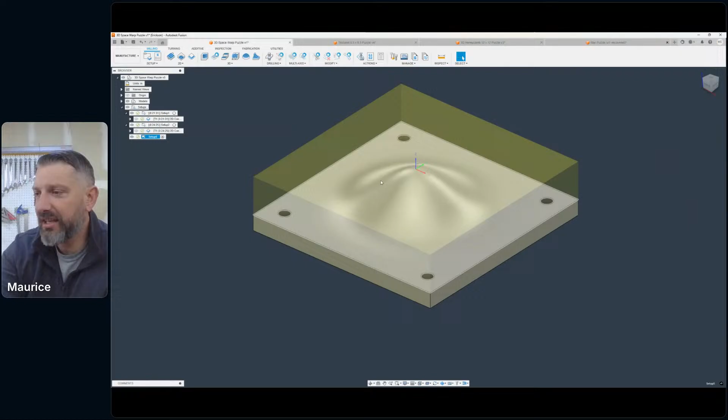So with this, let's go ahead and do a clearing operation because this is a lot of material that needs to get chucked out. Let's use a 1/4 inch bit.

So I'll end up using Amana. Let's see, this is 46202. This is a really good bit, and it's really fast, and it will chuck all of that material right out. So that is 46202, and we'll look that up in the Amana local library, and there it is. So there's my bit.

Let's go ahead, and that's way too fast. This needs to be 90. And that automatically changes all my lead in, lead outs, all the other things. 18,000 RPM is still good, but 180 is way too fast for my belt-driven system. Okay, so I'm going to do a bounding box to keep the tool inside this area. And then it's going to cut everything else out. So that's the only thing I have to do with that.

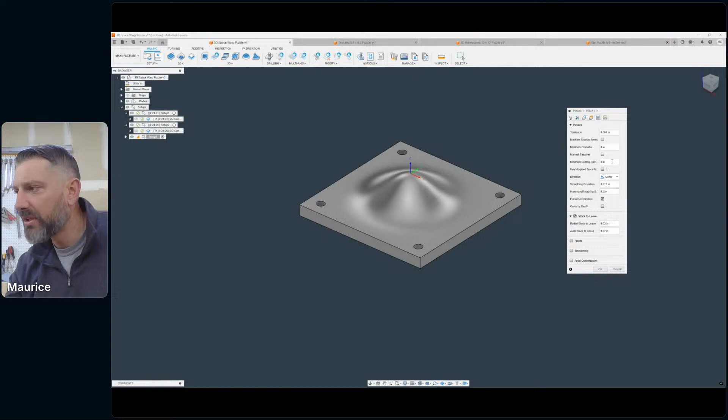For the passes, I'm going to leave a little stock, 0.02. That way I still have meat for my ball nose. I won't be gouging into anything. So the maximum roughing step down, let's put that to 0.2. So what that'll do is it won't go past that 0.2 as it plunges into the material. That's the only thing we need to change.

And I'm going to change my ramp to plunge. Everything else is defaulted. I didn't have to change anything. Everything was good. So I'm going to hit OK on that. Then it's going to generate this tool path. And what it ended up doing is it drilled those holes already automatically. So it accounted for that.

And just for giggles, let's simulate this and make sure those holes were actually good. But again, those holes are still at 0.25, or it's still left stock 0.02. So those technically aren't within the parameters that I wanted for the dowels to go into that base. So I ended up drilling it 0.373, which I don't want. So we're going to go back in and fix that.

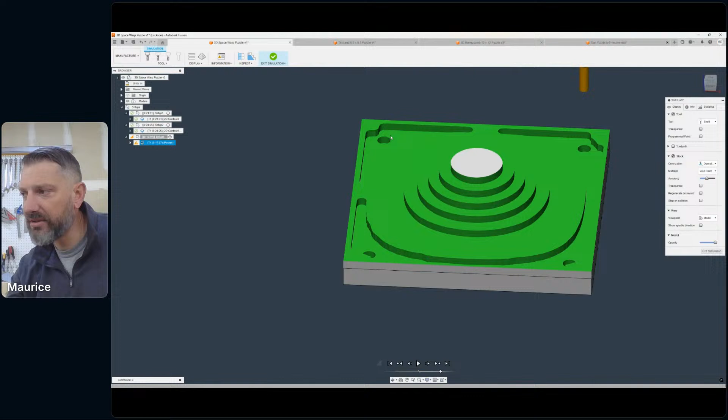All right. So that's the tool path. That's the material that it ate out. I don't know why it left this ridge. That doesn't make any sense. Let's go back. Let's double check this. Why did you do that? Yeah. Let's try that. Nope. I don't want rest machining on. Don't have to do any of that.

It's probably because of that 0.02, but that doesn't make any sense. I'll have to check in on that. Maybe because it's centered. So I can keep the tool outside of the boundary. So let's see if that corrected it. Nope. Interesting. Even though this is 0.2, maybe 0.25, extra material that it didn't hog out, which it should have. I'm not sure why it's doing that.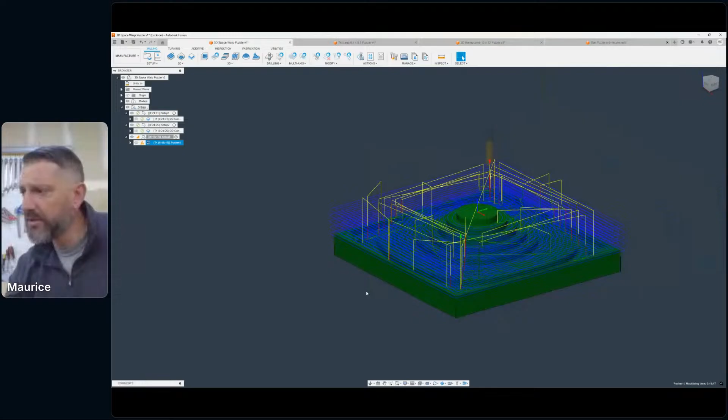Let's do model. No, it's still doing it. If I was to restart my computer, it would probably take that out. I think that's an error right now on Fusion. It just needs a restart to overcome that. You would be surprised how many restarts Fusion needs. It's the name of the game.

So we can leave it. But now what I want to do is make sure that I hit my tolerance for the overall dimensions of these pockets. So I'm going to use the same tool, and I'm going to machine these pockets one more time, just those 4 pockets. And then I'm going to uncheck the stock to leave. So it's going to cut exactly 0.375 for the diameter of those holes.

I can change this to right. It's fine. It really doesn't matter. I'm going to change this to plunge. And I'm going to hit OK on that. So the tool path is just going to drill, and it's going to make sure that those are in tolerance for the 0.375.

Let me double check. And it's to note, what ended up happening is it didn't account for any of this material already gone. That's what rest machining is for. So if I was to hit rest machining, it would take the original thickness of the material, and it would account for this tool path. If it's unchecked, it doesn't account for any of that.

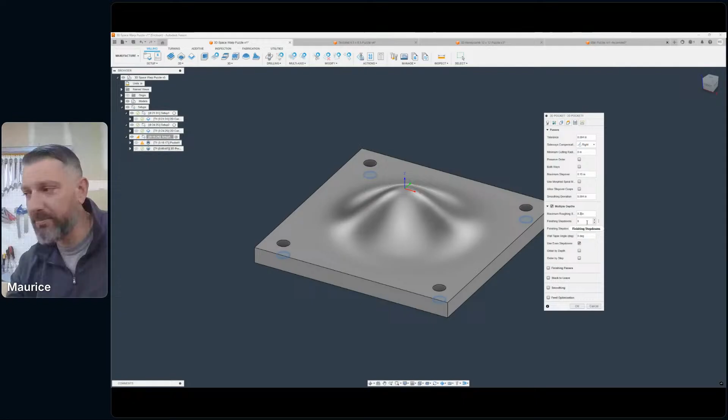So if I was to change this, and because I didn't put any multiple depths in, if I click that and say I want to go down every 0.2, if I hit OK on that and I don't have rest machining on, it's going to think that there's material. And now I got 1, 2, 3, 4, 5, 6, 7 passes to drill that hole.

If I go back in here and I click rest machining, it's weird, and hit OK, it should account for it. And right now it's not. Give me 1 second. I'm going to hide this warning. Let me rerun this without it. Now, let me rerun. Let's do 0.125 for the tool diameter, now it should account for it.

Oh, yeah, I need to restart Fusion. It's okay. I'm going to go ahead and take these passes off. But the concept is true. So rest machining, if it's checked, it accounts for all the material that was eaten by your last tool path. And if it's unchecked, it won't take that into account, and it will still think that there's material there. So let me hit OK on that.

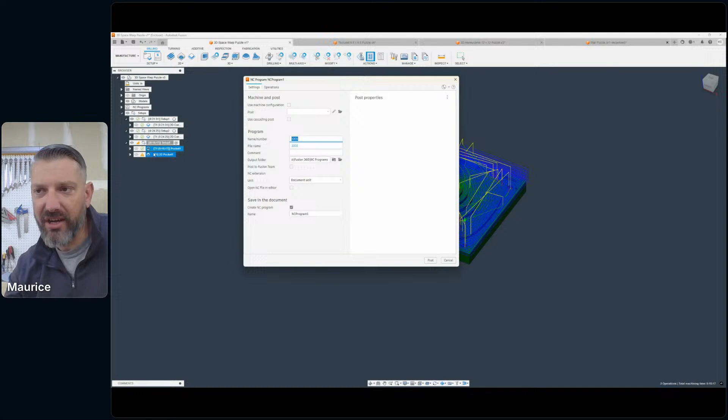And so what I'm going to do is I'm going to highlight both these tool paths. And I'm going to right click. I'm going to post process. And you can't do this with the free version, but for the paid version, I can combine these. Since these are the same tools, it will put it under one tool path. So it'll just be one file, and it will cut both these out. And then I would just post it normally. It would just get included.

Right now, what I'll do is I'm just going to go ahead and lock these or protect them. Basically, locking those tool paths to say these are good to go. And whatever I do to the model now, it won't account for any of that stuff. So I'm going to go back to design. And this extrude for these buttons, I'm going to suppress that. Meaning that they were never there in the first place. But in my tool paths, it still accounts for them.

It's still there. And the only reason why I do that is because I don't want my 3D ball nose to go into those crevices and do anything to those holes. Those holes are good to go, and I don't want it to mess with any of that. So now what I can do is I just go to a parallel, and I can select my 3D tool, which will be this. We'll do 100 for my feed rate. For the boundary, I'm going to select this bounding box.

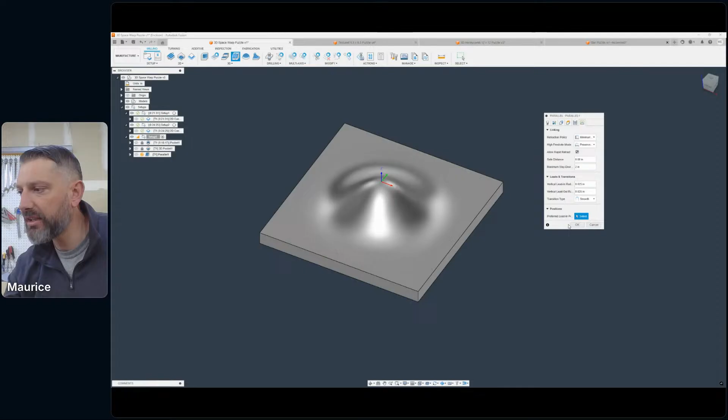And then I'm going to do it all in one pass because I already know that all this material is gone. And I'm going to keep the tool down, minimum retract, and I'm going to hit OK. So about a 30-minute. I didn't adjust. I left the defaults for the step over. Matter of fact, I'm going to go ahead and decrease that. And I can do that in the passes. And I'm going to do this as 0.1. So I'm going to decrease that.

Rerun it. Adds about another 15 minutes, but with that 15 minutes these step overs are so close to each other that there's really no sanding that you have to do, or you'll have to do a little bit of finalized sanding, but you won't be sanding off any machine marks. And what you noticed is it didn't cut or didn't do anything to that hole. So that's the bottom side. So this is good to go. I can post process this, and when it's time, it's a completely separate file.

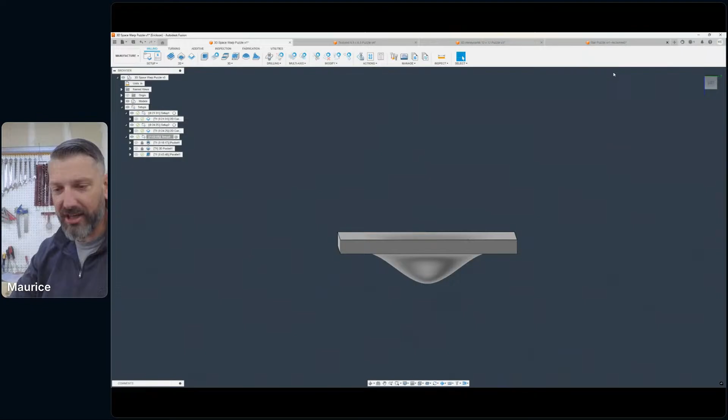What I need to do though is I need to make a jig. So when I flip this thing over to machine this side, to make sure that these puzzle pieces, again, they're all interlinked, I don't want them to move. I need to flip this upside down and basically glue it to a substrate. So the jig is this reverse image and it's all supporting itself and nothing should move. So later on, probably Monday or Tuesday, I'll make a jig that has this profile cut into it. So when I do flip it, it's just gonna sit right in the same spot and it will be fully supported to make sure none of those puzzle pieces move.

But before I do any of that, I almost forgot to cut the lines in. So to do that, let's go ahead and bring up this sketch. Not this one. I'm going to move this up. Sketch objects. I'm going to select this. Just going to make sure this is above.

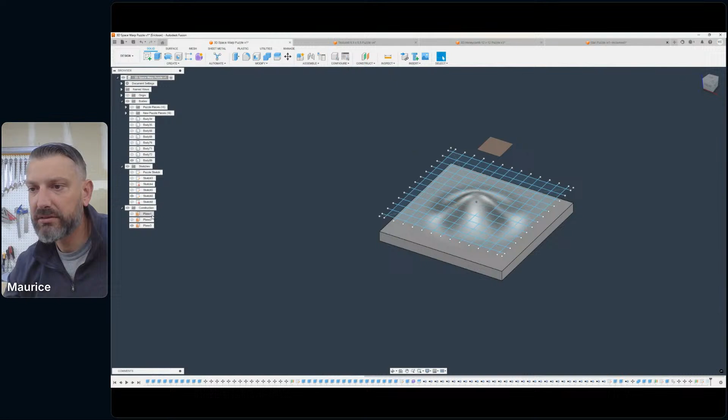The best way to do this. Yeah. I'm going to edit this and bring this a little bit higher. And all that is just sitting just a little bit above it.

All right. So what we're going to do is we're going to V-carve this into this base feature. So let's go ahead and we'll use the project tool. I have a couple videos on this that go pretty in depth on how to actually do this. I'm going to hide this plane and get this thing kind of cleaned up again. And then I'm going to project this sketch onto this surface to V-carve it. So we'll use the project tool.

Let's see, what do I have loaded in? I have 30-degree quarter-inch V bit. Yep, 30 degrees. It's perfect. All right, so let's go ahead and we'll disable that. The speeds are good. Machine boundary, let's use this box.

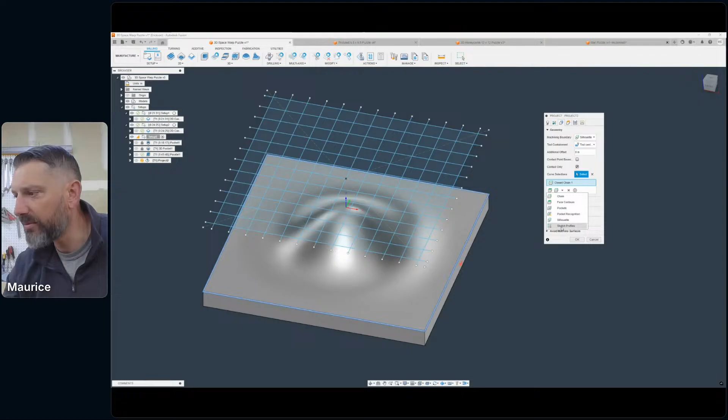And then for the curve selection, we're going to drop this little caret down and go to sketch profile. Then I'm going to go through my browser tree and find this sketch. I'm going to click on it, and that should be good. So now all of these sketch profiles are highlighted. So that means this profile is good for the sketch. It's going to cut all of these lines out, and then it's going to be bounded in between this box.

For the passes, let's go a negative 0.04. I don't have to do multiple depths because it's such a small cut that it's not going down that far at all. We'll keep this as minimum retract and then we'll hit OK.

All right. So let's go ahead and we'll hide the sketch. We'll hide this body. And then we'll be able to see that it followed that contour of the bottom. So all those lines are good. And again, these lines are all symmetrical. They're all equal, depending on how you flip for the dual sided. They will all equal the same because you're using the same zero for your top cut. So the bottom lines will match up with the top lines on the profile that you cut on the bottom and the top.

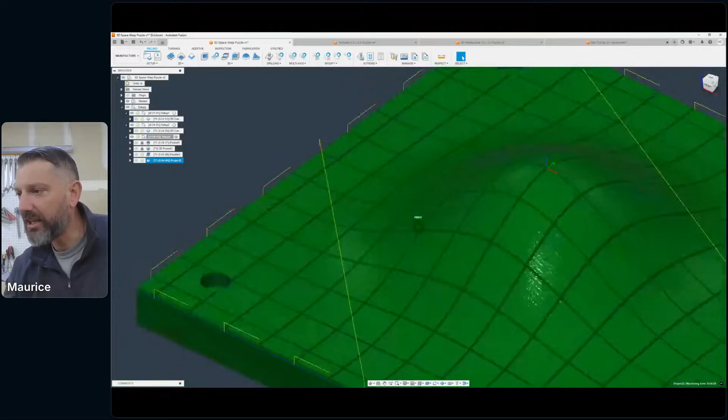Very, very important. If you cut these wrong, or if your zero is off just a little bit, you're going to notice it really, really fast. But the V-carve is done. It followed the contours. And now what we can do is we can do the top. But again, I'm going to make a jig for this profile to sit onto so I can cut the rest of this profile out.

Okay, so with that, this entire toolpath's done. I can post process. Those are good to go. So as of right now, I have all the puzzle pieces cut out. They're all put together. I've cut the bottom of the profile out, and now we'll cut out the top profile. And what we'll do is we'll unhide not this one, not this one, not this one, but this one.

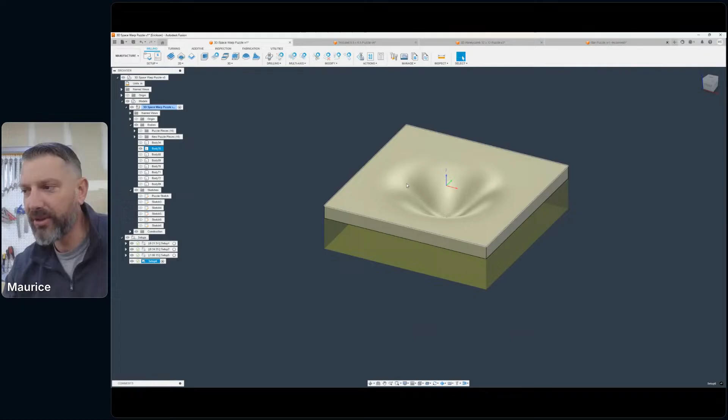Okay. And we will create a new setup. We'll use relative without any additional stock. So it's basically the same thing, except it's just pointed correctly. From here, I'll redo my zero point, and my Z, X, and Y axis are all pointing the same. And I'm going to hit OK on that. So from here, this is not a big crevice, but I'll still program the cuts to do this.

Now I can go up here and redo all of this again with the pocket clearing, or I can come into my browser tree and the previous one that I made to do the bottom side, I can copy that and paste it into this workflow. I'll still have to edit this. So let's go ahead. We're going to unsuppress because it copied it over that way. But I'm just going to double click. It has my tool in there. It has all my correct speeds and feeds that I adjusted.

I can go into geometry now, and I'm going to just select this boundary. I'm going to delete this model check mark. I don't need that anymore. And then here, all of this stays the same. The stock to leave is still the same. The maximum roughing step down is still 0.2, which is perfect. And then for linking, all of this stays the same. I'm just going to hit OK.

Very fast way of just getting it back to something that you modified to work for a previous one, and you can just copy and paste it right into your next setup. Now, the lift and retract, that's a setting issue that I have with Fusion on my computer right now. I'm just going to ignore that.

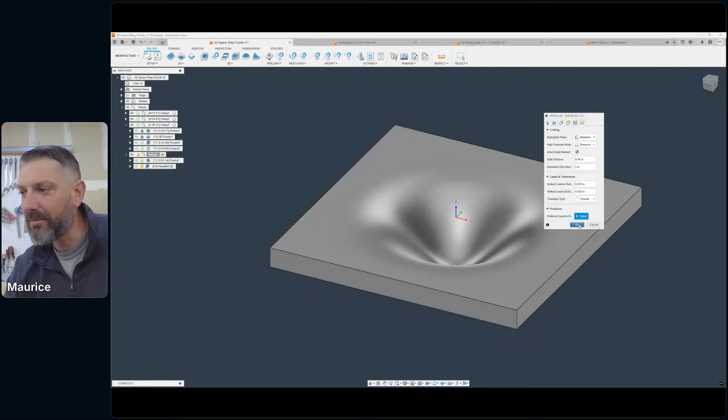So from here, I'm going to delete that boundary block, or the machining boundary, and I'm going to select this top portion. I don't have to change anything other than that, and it will give me all the same settings, everything that I had for my prior cuts, and I'm just going to hit OK. And that gives me all the toolpath generation to do that. It's again about 43 minutes for the travel time.

And now what we'll do is we'll copy, again, Control C on the V carve, and I'm going to paste it into this setup. Paste. I'm going to open that back up. Again, the same tool was brought over. The same profile sketch is still there. Everything is the same. What I'm going to do though is I'm going to delete this boundary box. I don't need that.

Oop. All right, so boundary, we'll do this selection. We'll find that sketch again. Yeah. Curve selections, we'll select this sketch. We'll hit OK. Well, let's just make sure everything else is good. Good, and good. Now we'll hit OK.

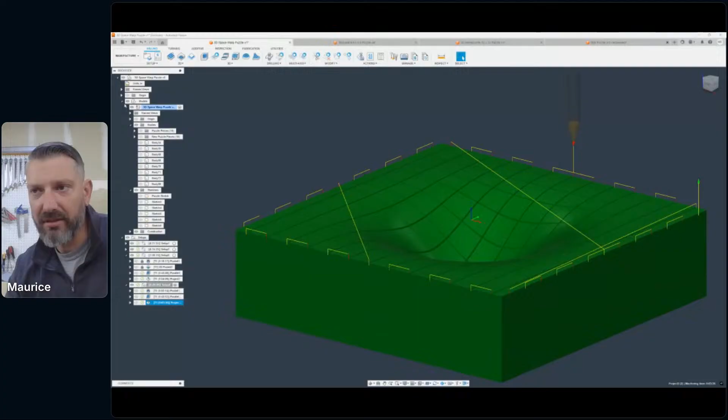And then it's just going to do the same machining operation. All the parameters are the same. The depth of cut, the line thickness is all the same. So the bottom lines will be the same thickness as the top lines. And we should be 100% good to go. All right. And it looks like we are. So there's the top portion. And then after that, it's done.

I have all the toolpath generations to cut the puzzle pieces out. I have the bottom of the dual-sided machining done. And then the top portion is done. So when it's all said and done, even though you can't see the individual puzzle cuts, it will end up looking like this. The only thing that is missing is the grid patterns, and I could put that in if I wanted to. I'm not going to do that right now, though.

But yeah, that's it. That's a typical workflow of doing multiple different bits into dual-sided machining and different strategies on getting other things to click in, get cinched in, and actually machined. I'm probably going to do a little bit of work tonight, but again, the whole purpose of the live stream was just to visualize how I do some of my designing, and if I can answer any questions, great, and then we'll just keep going from there. So this will definitely be a next video, and I'll see if I can get these tolerances to actually click these things together.

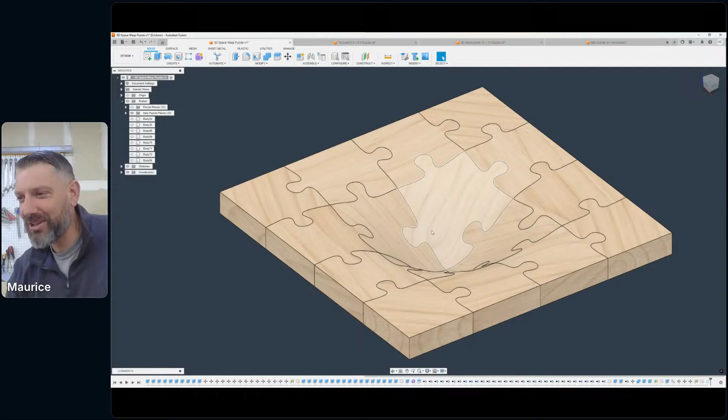Yeah. Yep. Yeah, they're definitely unsupported. And so the tolerances just have to be a little bit tighter, not much, but if you can get it tight to where you can actually slide them in together, the weight will bind them together and they won't move. It's almost a fact. So if they're too loose, they'll fall apart.